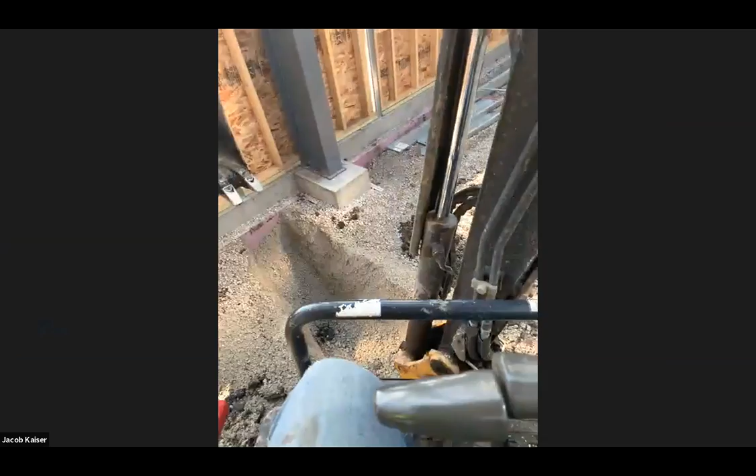Yeah, I'm here now. Hello. Hello, what's up? What's up, brother? Hi, Jacob, look at that. Look what I'm doing today. This stuff here. Oh yeah, that's what I'm talking about. I'm doing a little excavating, making a trench. That's always fun. Are you?

Do you have an operator's button? Doesn't matter. What did you ask, Zach? You have an operator's button. A what? Never mind. I don't know -- operator's button? Button? I don't know. That's what he said. Don't know. Yeah, whatever.

Yep, all right, well good talk. Hey, why don't you throw your phone in that hole real quick? You did it, how's that? Okay, now get on that excavator and pick it up, lift the bucket. No, bury it. Nah, I'm not gonna do that. If it meant an A in the class I would do it, but other than that, wait. I think you should give him the A in the class and just let him bury his phone.

Let's get down to business. What is today, Thursday? Yeah, it's still Thursday. Yep.

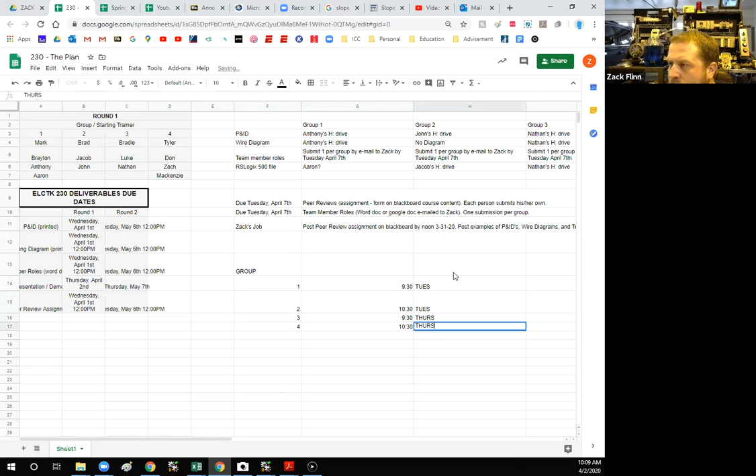Does that make sense to everybody? Starting next week, we'll meet with your group, gather all these inputs and outputs together, and build your own process from scratch together. Sound good? Yeah, that's good.

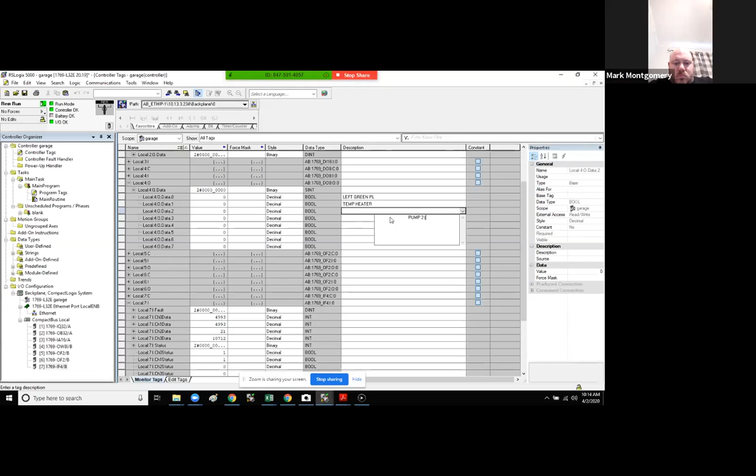Is pump 2. And... 3 is pump 1.

Okay, alright. Module 5 only had one, on channel 0. It had an inverted digital display that displayed 0 to 5.

Oh, okay. You said we were going to have to do funky math with that one. Yeah, it's going to be fun. And then that was it for Module 5.

Module 6, channel 0 had a single-phase motor, and channel 1 had a three-phase motor. So the single phase motor is the temp fan, single phase, white.

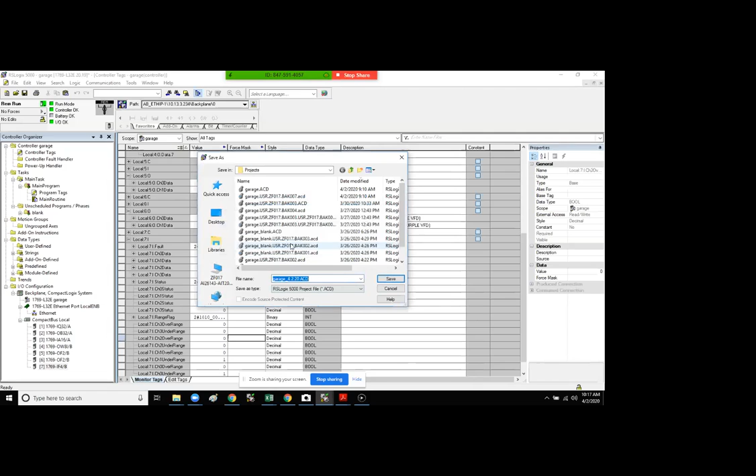Now what do we want to do? Well, looking at what we have, we could make like a fictional heater of some sort, something that heats up and then vents heat while the heating element is going. I don't know what we need a distance sensor for. We use a temp sensor for that.

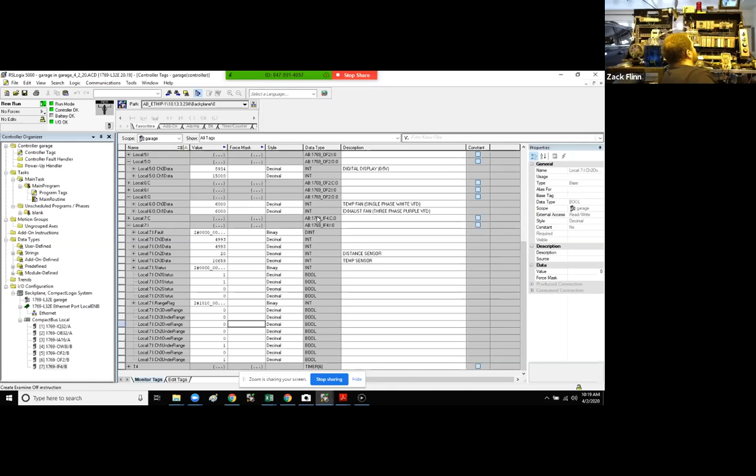So what's turning the water? Which input would that be? Did we not have that one on there? No. Wasn't it a magnet of some sort? Oh yeah, okay, Module 4, output 7. Module 4, channel 7. Yep. And that's going to be water, heat, and stir.

I always like to start off a PLC process by having the stop button going into the start button—if we already have this down, we don't need it. But in this case, it would go to a start button in series with a switch left, going to a bit, and then the bit being enabled by the bit itself for it to go.

Where did I put that assignment? Oh, 232. Does anybody else have it pulled up? Is anybody else paying attention? Or is it just me and Nathan working on this?

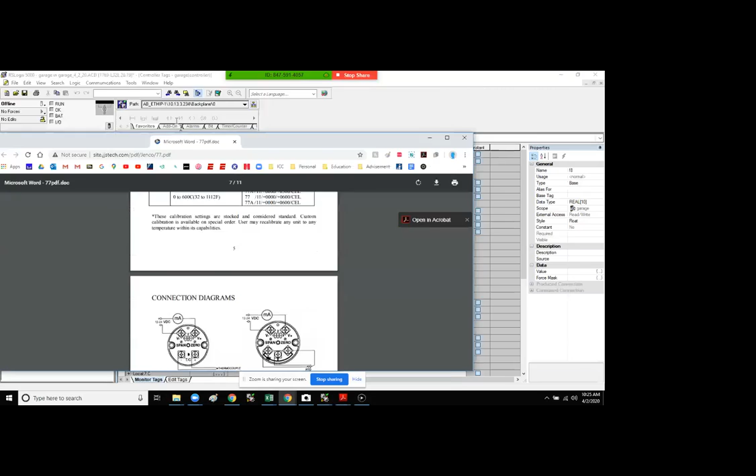Remember, I want you guys to remember that for your final, you're going to have a process like this. Whoops, not like that. Like the one on Blackboard, like this. It's not going to be this big, but you're going to have to set the entire thing up.

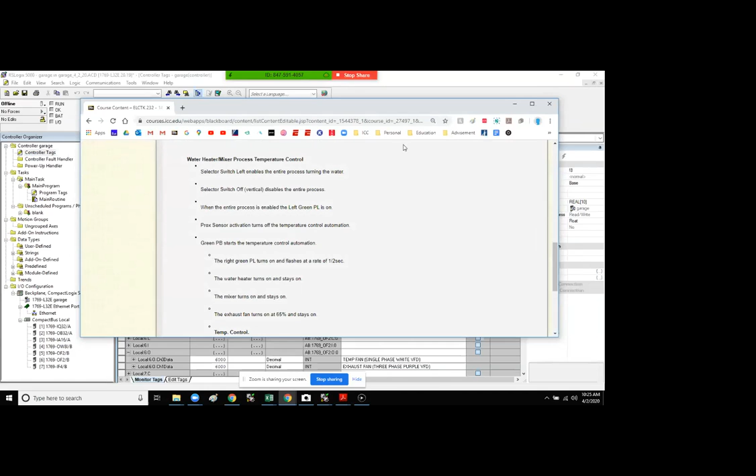So I don't want just one person telling me everything to do. I'm sure some of you are taking notes and everything, that's great, but the more involved you are, the better chance you have of doing well on the final, right? Because I'm gonna help you. This whole COVID-19 process is not fun for anybody, but I'm not going to give you the answers. If you don't know how to set this stuff up, it's not going to be good.

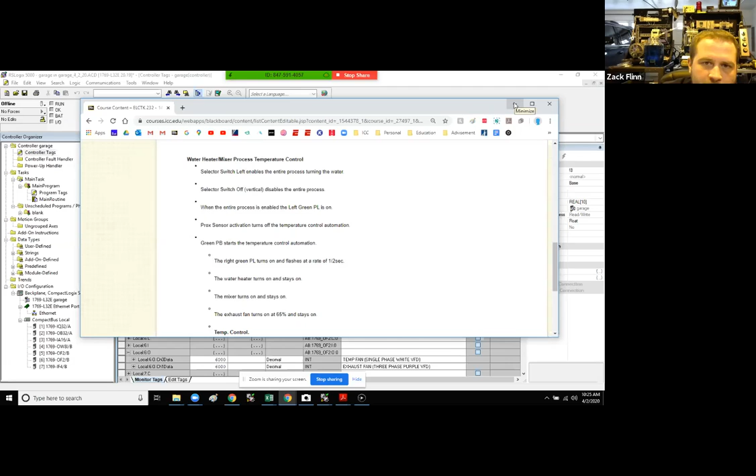Okay, how are we going to set up? Are we just going to write an explanation? No, you're going to get on a one-on-one Zoom meeting with me, and you're going to do exactly what we're doing. You're going to tell me how to set up the controller, how to put the I/O in there, and then you're going to write the logic. You're going to create your own tags, write the logic for whatever process I give you. Would it be simpler for you to just configure it the day before, but we tell you during the process just how we would configure it and insert modules? No. I'm probably going to fail.

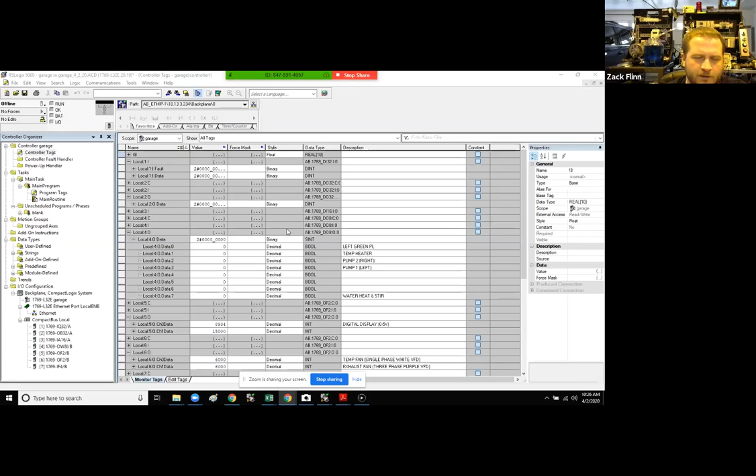Nice try, Nathan. No, I was just wondering. You won't have to tell me.

Okay, right-click on that, go down there. If you tell me, we need to input the I/Os. Tell me how to do the first one, and I'll throw the rest in for you pretty quick. I'm not going to make you take an hour just to tell me step by step how to put these modules in.

Will they be the same modules as we've had, or are they going to be different? They're going to be the same ones, because I'm too lazy to change out all the modules on the trainer. It'll literally be the same setup, Brad, except a different process. Correct, I can do that then. You can do that, maybe.

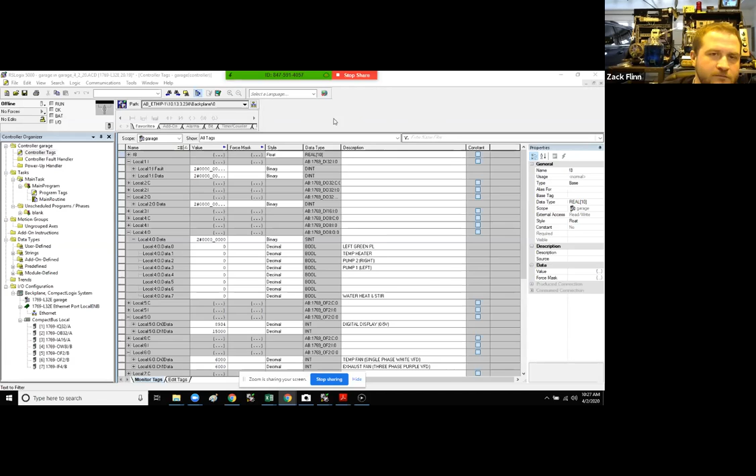I like our RS Logix 500 better than the 5000. Well, I do too, to be honest with you, Don. But if I'm working for somebody that uses 5000, I'm not going to start raising a fuss over it. I'm just going to do it. I completely understand.

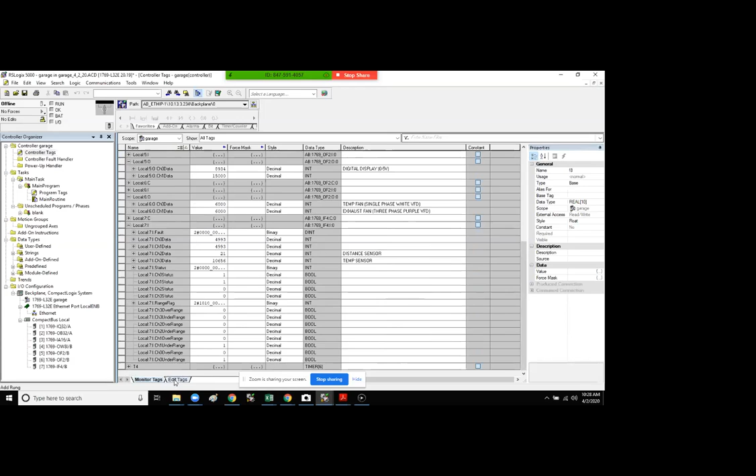Okay, so what are we doing? You were in the process of making up a binary bit. What would you like me to do? Well, there has to be 32 bits, so you have to go to where you were just at, inputting names. Go to that edit tags where you're bouncing all over the place.

And then I don't know what that is. I can't even really see what that is. What is that? It's just a picture of a tag, saying here's where you'd add a new one if you want to. Oh okay, well then why don't we add a new one? Let's do that, that sounds like a good idea.

He was nice enough to give us the timers already. You want to make it Boolean. Very good. How many do we want? You need 32.

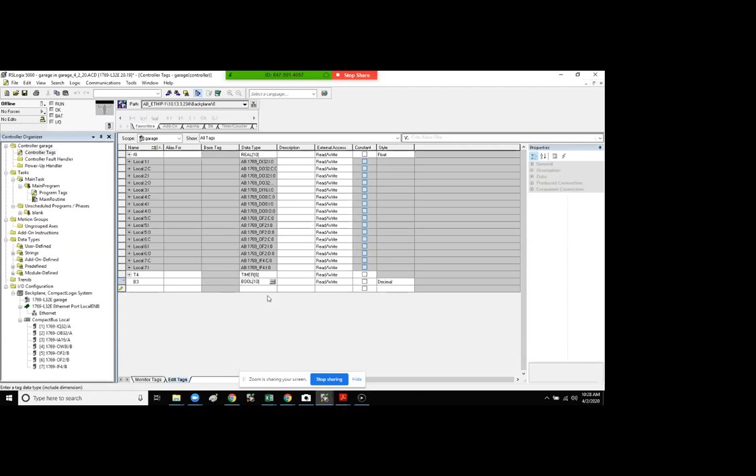Well, 32 is automatically going to come up. Okay, cool, in like Flynn. Okay, so put the bit in.

Oh my God, how much longer we got? Half an hour, potentially. What did you say? Half an hour. Yeah, it feels like forever. You're right.

Sorry, we'll get through this together. Sorry I was quiet during that first 20 minutes, I may have been distracted. Oh you're fine, it's okay John, I've been carrying the class. I appreciate it, Nathan, nice to see you step up, thanks to Nathan, while Jacob's at site and I'm working on other work.

Want me to label this thing? Yeah, label it, what do you want? Totes McGoats run bit.

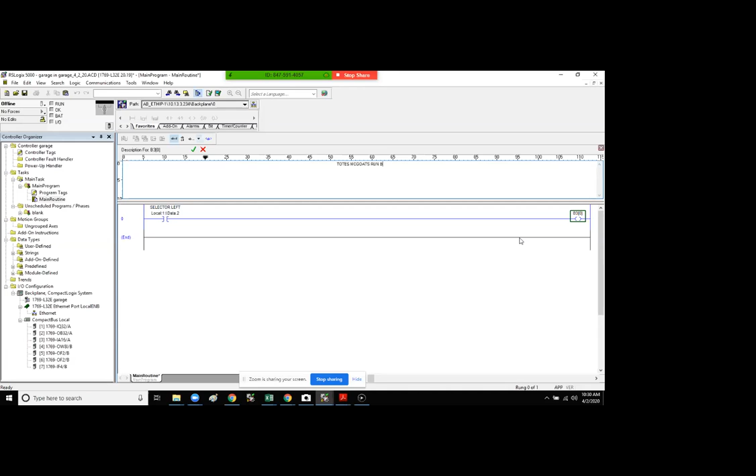That works, that's a little long, especially since we're trying to make it shorter when we have to. You know, it'll work, it'll work.

Yeah, you're never going to forget it, are you? I'm not. Would you put the bracket over the thingy? Selector switch? Oh, you don't need it because, okay yeah, never mind.

All right, selector switch left enables the entire process, turning on the water. Turning the water.

Wouldn't you just put the output of channel 7, water heat and stir bit right there? Where do you want it? At the end of the second line? At the end of line 1, I guess.

Yeah, but can we put it on rung 0 somewhere, just to save room? I mean, you could. Sure, where do you want to do that?

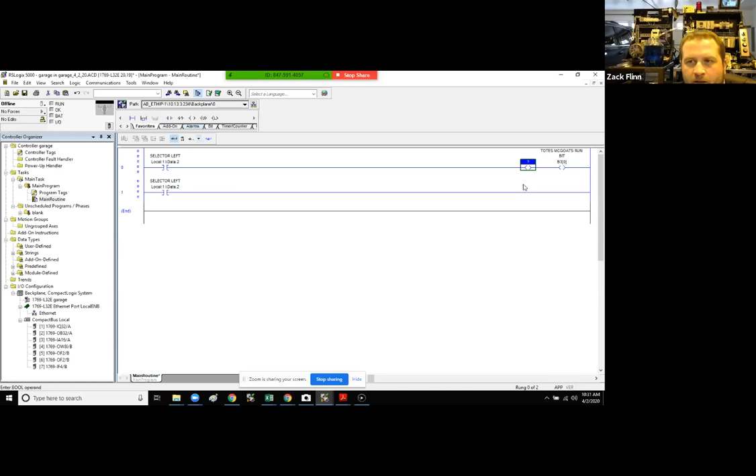Doesn't it have to be? Does it have to be in parallel with the other bit, or can it be in series? You tell me. If we put it here, and this one becomes false, you've got to put them in parallel. Yeah, you have to be able to. This one will become false, right?

Okay, it's like any output, right? Yeah, you can't have two outputs on the same rung. I mean, Zack probably can, but if we do, it won't work.

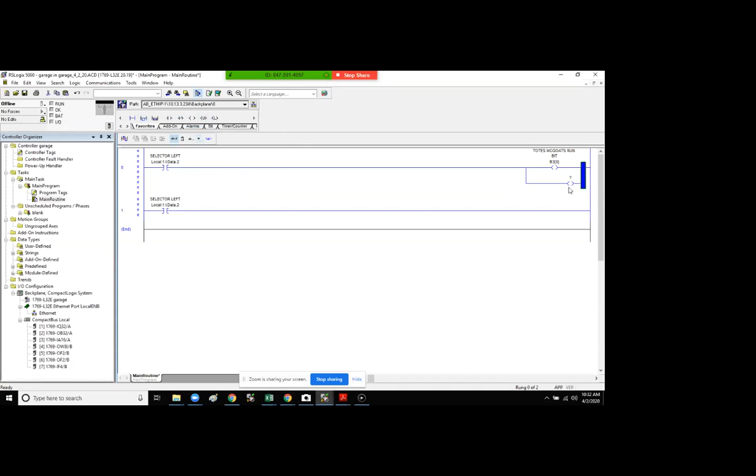Now how come we have the selector switch in both rungs? This is just a, oops, that's a run bit. Yeah, shouldn't that be the binary bit that we just made? That's an A right there. I caught the mistake, sorry.

What are we trying to do there? When we have the selector switch to the left, what are you trying to do? Wouldn't that be turning on this entire process, the water heater slash stir?

You need to turn that on. So whenever the process is on, the overall process, it's like there's an overall process, and then there's part of the process where we're controlling the temperature, right? All right.

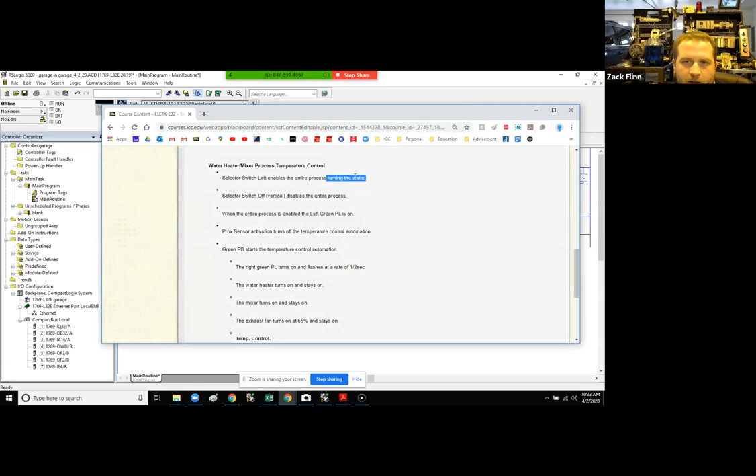Okay, so heat and stir are going to come on at the same time. That's how I'm reading it. So we need that output to be module 4, channel 7 for the heater and stir.

But how do we get the heater not to turn on and just to stir? So that's the water heat. Oh, okay, we're going to kind of fake the temperature heat.

Gerard, your mom wants you.

Hey, could you do something for me, Zach? Could you put a normally closed contact in series with the normally open contact and make it the selector, right?

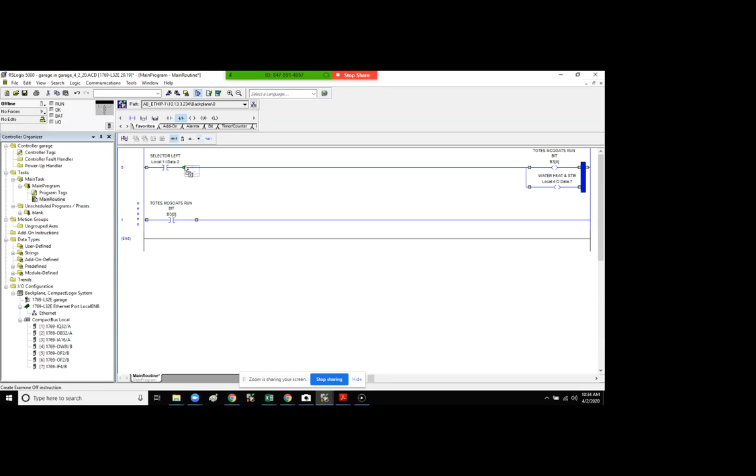Why are we doing this? So that you can't run both at the same time, correct.

Which is fine, but I don't think we need it, because I guess unless... whatever, we'll leave it. Doesn't matter. It wouldn't be necessary, I don't think, unless something's shorted together. It's totally redundant, but it's a safety thing. I like it. Okay.

That's funny because every time I walk into your classroom... Don't go there, John, don't go there. I just went there. Does it make you sick to your stomach? Makes me cringe, cringe, that's what it is.

All right, should we test this out? It's a good idea to build a little bit of logic and test it out before we move on.

Yeah, sure. So suppose when I energize selector left, this bit should become true, and the water should start to heat up and stir.

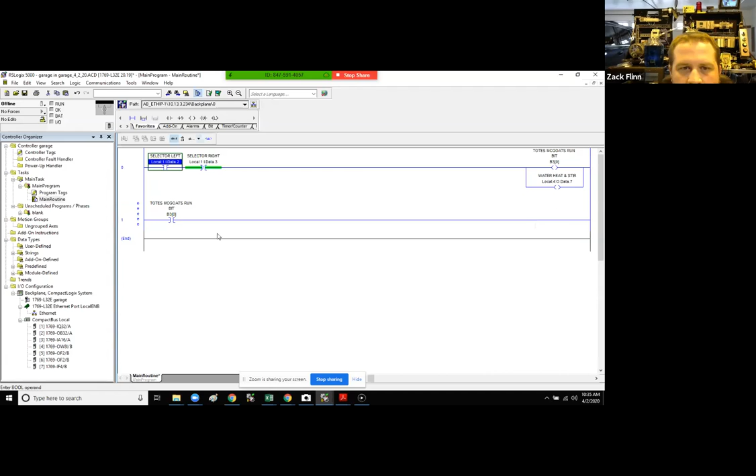Oh great, could you put the motor in that rung? Otherwise we're gonna get... oh never mind, you did it. Okay cool. What motor? It didn't really matter which motor, it would have just been a short. Right, yeah, get a fault.

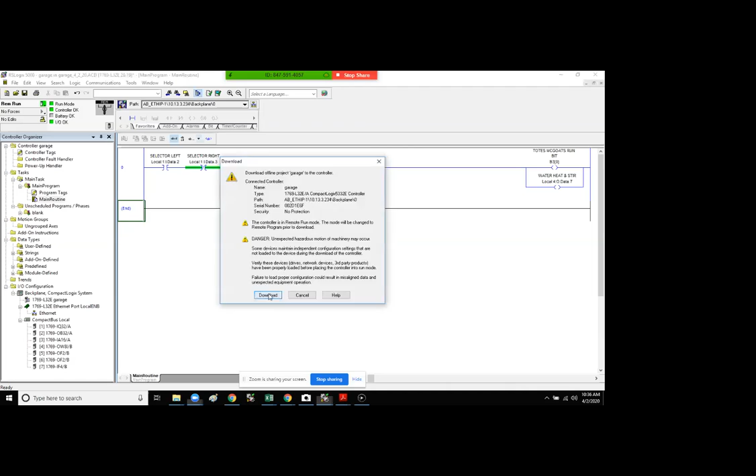All right, selector going to left. Cool, I'm going to show you what's going on here.

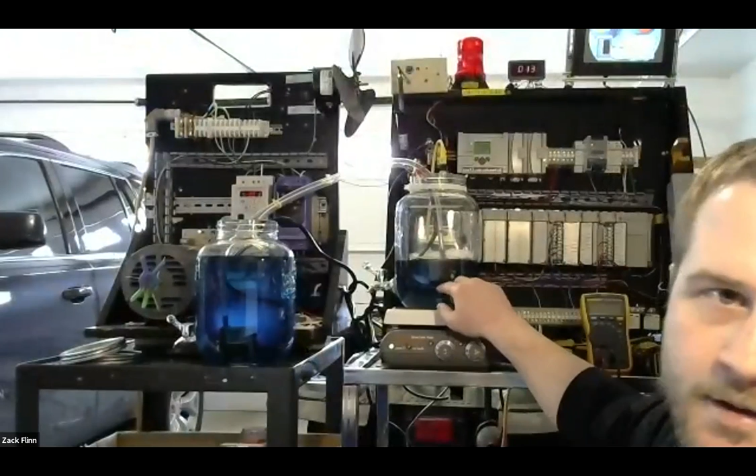So, for some reason, I smoked whatever the motor is spinning the magnet inside there, so it always stirs. I can turn it up and down, but the heat won't come on until we energize that bit. So you'll see the two pilot lights come on for those outputs. Ready?

Oh yeah, all I'm seeing is Kenzie's face because she talked. You got to pin the video. You can also go to the top right and go into gallery view. You can, but if you want to see full screen, click on the three dots. Hit video, there we go, and then it won't move.

Are we making moonshine, Zach? Well, Brady said yesterday that it was a meth lab. So whatever you guys want. Oh okay, why not meth, it's worth more. You like the blue food coloring so you can see it better? Yeah, that's nice, it'd be better if you had LED lights on it. Yeah, I'm still not really thrilled with those. I've got some UV lights. You know, you seem to smoke a lot of components, Zach. I've got some.

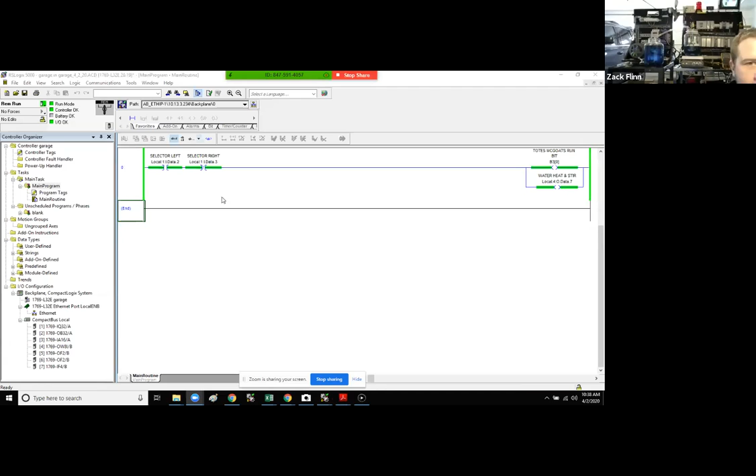John, just go to bed. I'm just giving you shit. Whatever.

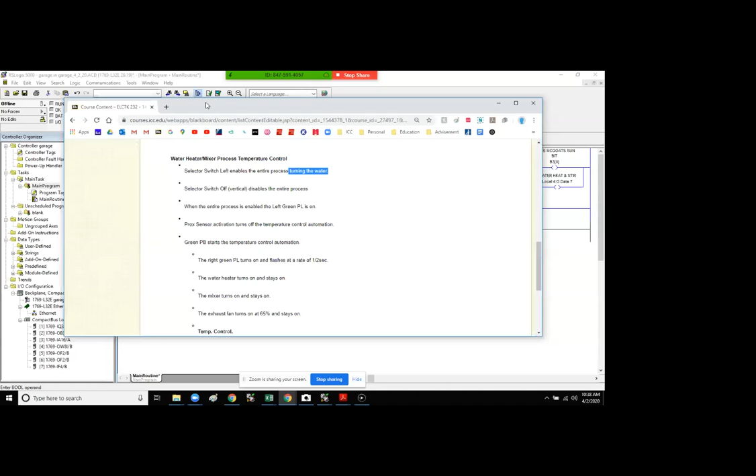Now what do you want to do? Where's those instructions at? Are those on Blackboard? Where are they? It says 232. They're on Blackboard, I don't see it. What class are we in? 232. Well, right now, technically, we're in 230, but we're working on 232 stuff.

I'm just sitting here watching. What I'm thinking is you're going to need to know this stuff for both classes, right? We're using the same setup, so the more we practice this stuff, the better off we'll be.

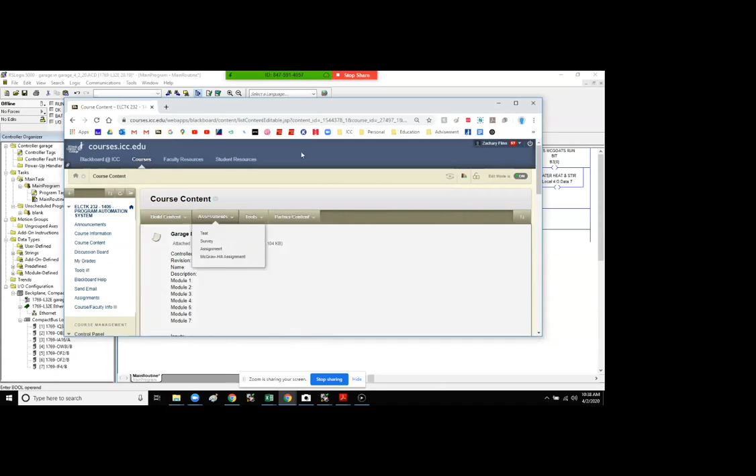All right, so we need a third output in that branch over there where the bit and the thing are. It needs to be the left green pilot light.

I had to rewatch episode 4 of The Witcher because I was doing taxes, so I missed a lot of it.

Yeah, that's what I'm gonna have to go back a little bit on season 2 of Following because...

Is that your dad? Shut up, Nate. Tell your dad I said hi. Did someone say dad? Dad said hi. He said hi? Hi, bye, Nate. Hi.

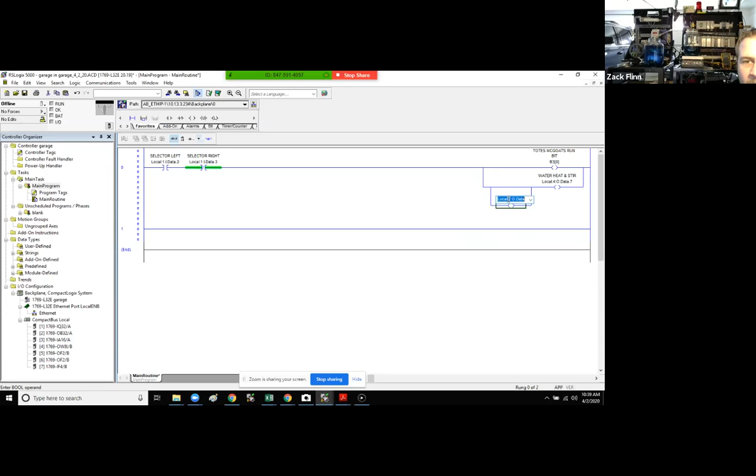You got the green PL on already? So I was gonna ask, do we have any of the green lights on? We want the left, or any one? Green, red, or yellow? The left says green, the right green PL light turns on. Oh no, I'm sorry, left green. I'm reading ahead, sorry. So the left green is the 120 volt one, right?

Yeah, so it's output 4? I can look here. Let's see, left green pilot light is 40. Output 40.

Cool, all right, so now we'll need another line. I'm not even looking at your screen, so I don't know. But we'll have to start one for the green push button. Starts the temperature control automation. Okay.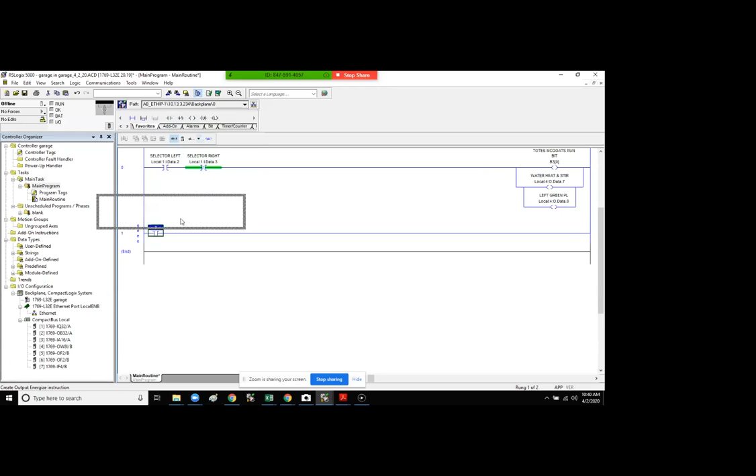I didn't know you could drag that down off of there. Were you just able to drag that down onto the main screen? I think that's only for 5,000.

Zach, put another normally closed now on this line, because this line won't have the turn off everything, so it won't be redundant. We need the selector switch, right? I'm not sure what you're trying to do. Right, so if you put the green push button there for this next system, and then you put the selector switch right there, it'll turn off the...

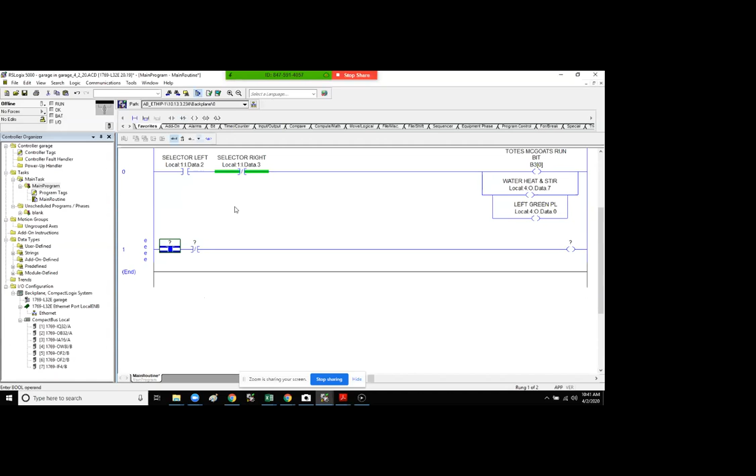Well, don't forget what we're doing with this rung. We have this guy here, right? We want to use that to run every single rung now, right? Except for, you don't need them for timers and everything else.

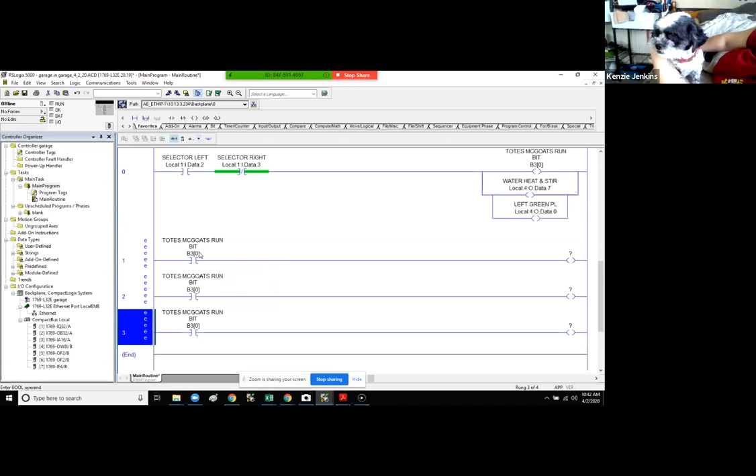Don't you want the green push button? I guess that works. Okay, yeah, you're right, put the green push button in also. What this does, anytime we create a rung now, I would create one that looks like this. So if I copy this rung, every time I add one, I have the Totes McGoats run bit in there. So if this thing ain't true, nothing's happening, right? None of these rungs will be true unless the Totes McGoats bit is true. You're right, you're right, I'm wrong. I thought I was wrong once, but I was mistaken.

Oh my god, that's so stupid. Pretty cocky. Why was the ketchup blushing? Oh God. Because it saw the salad dressing. Gross.

Brady's groan. Put your mask back on, Brady.

Okay, what do we want to do on rung 1? Which one, the Corona one or the ski mask one? Which one? Oh, wrong one. You want to add the green push button to?

Oklahoma, only two things come from Oklahoma. That's going to start the temperature thing. Steers and queers, boy, I don't see no horns. That's from Officer and a Gentleman.

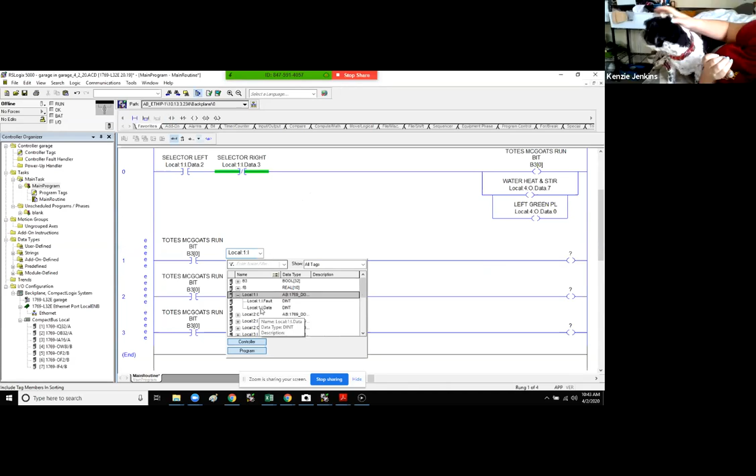What am I missing here on Zoom? What's going on?

They don't know. Junior, where you from, boy? Oklahoma, only two things come from Oklahoma: steers and queers. Boy, I don't see no horns. Nate, did you hear that? I'm pretty sure Kenzie's dad just called me a queer. No, you're right. Have you ever seen Officer and a Gentleman?

No, I thought that was Full Metal Jacket. Oh no, it's Officer and a Gentleman. It's also Full Metal Jacket. Louis Gossett Jr., when he's yelling at him? Yeah, Private Pyle, yeah. No, it's a classic movie, because he's yelling at Gere, at Richard Gere. Well, not at Richard Gere, but Richard Gere's in that scene.

Trust me, I believe you. It's just been a while since I've seen that one. Thank you for your input, Dad. I thought you said it was back up. Oh my, and all of a sudden it just clicked. That's funny.

Can't see. Zach, can you pull up the list? I'm sorry, I'm still waking up. The list so I can finish writing it down. Oh yeah.

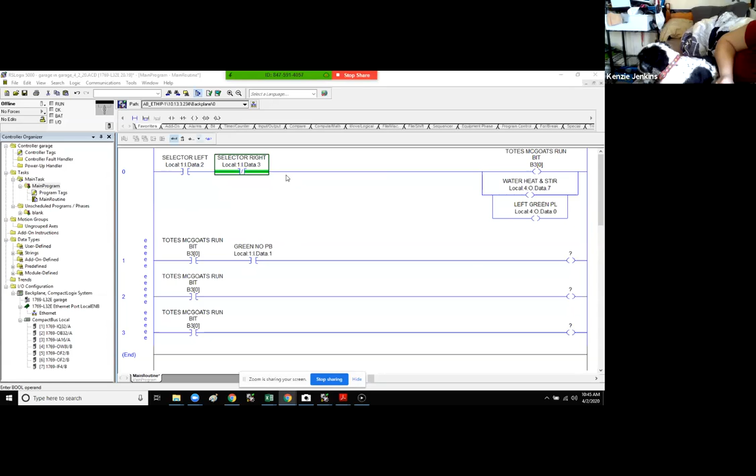Okay, so we got the green normal open push button, and now what do we want to do? Now you want to put the water heater.

We already got the output, water heater in there. Okay, then you want... We already have the mixer, right?

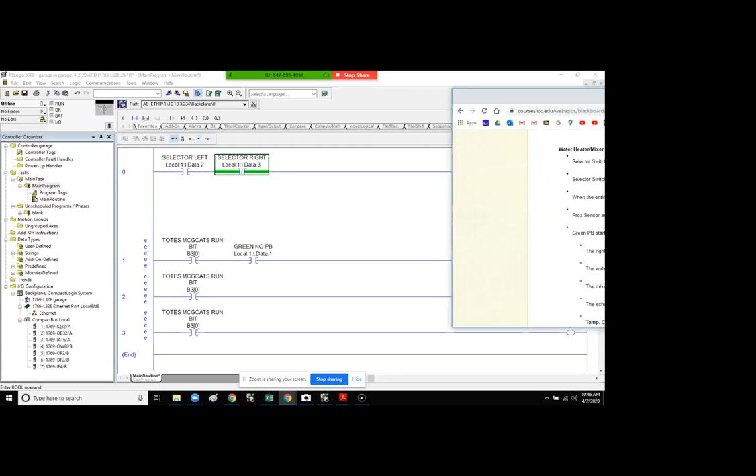Yep. Then we need the pilot light. Put the... not the pilot light, the strobe light. No, the right green.

How do we make it flash? Oh, you want us to do that. We need to put... dang it, Zach. The right green.

We need to put a timer on that. We need to put a timer, or Zach, what's that one that wouldn't work in 5,000? Dang it.

All right, someone Google how to make something turn on PLC at a half second. Oh. Nope, we're not doing any Googling.

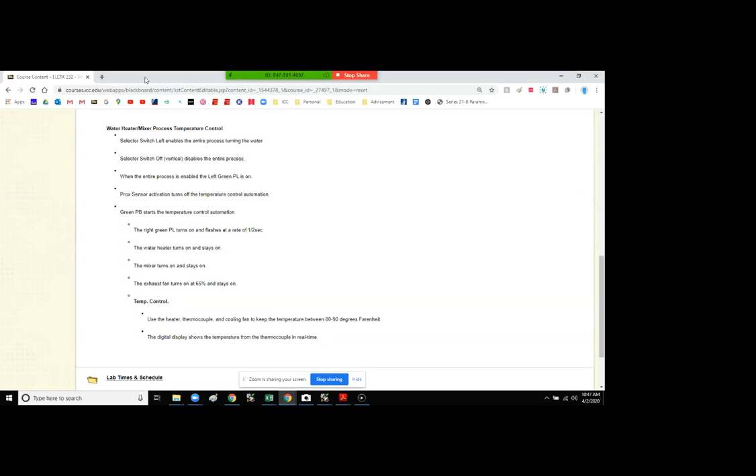The right green pilot light turned on and flashes at a rate of half a second. Isn't that just a time on delay? Yep. Yeah, because we used that in our trainer.

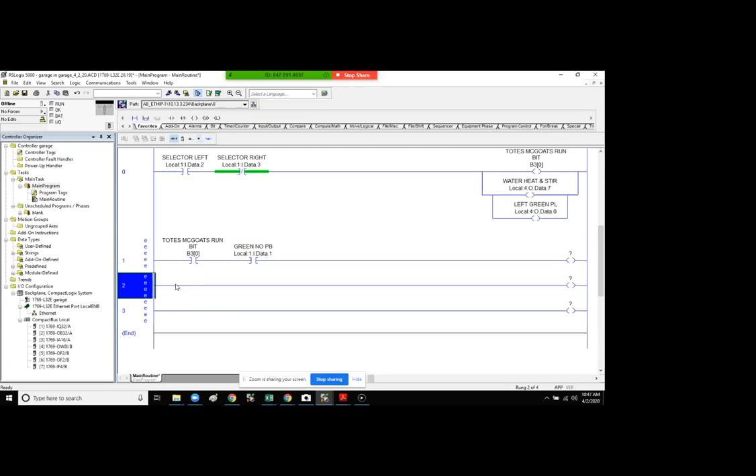It's not just a timer on delay, Kenzie. It's also a reset. Okay, listen here, bud. We'll get to that one step at a time.

Now what? Okay, so the timer, just set it to the first available bit. And then the preset, what did we say, half a second?

Yep. I want to show you something on RS Logix 5000. I had to look this up in the manual the other day because I forgot. Every preset default value is in milliseconds.

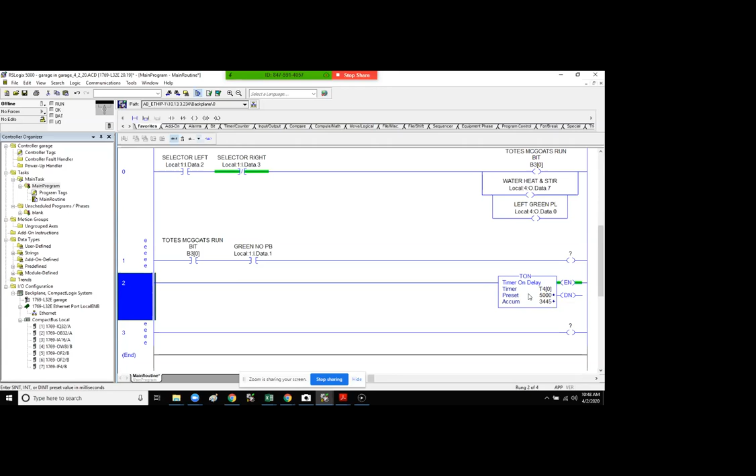Okay, now what? Okay, so then we have to set a bit to close whenever the time on delay is done. So it has to go based off the done bit. Where do you want it to go? On the next rung down. That's what I'm talking about.

Okay, so now we have the timer set up. What's turn? Let me pull up the process because I don't want you to have to keep going back to check. Right now, we're just trying to make a half-second flashing deal.

So an off delay timer? Do you want me to, what'd you say, Brady? Off delay timer? No, it would be another on delay timer, I believe. Alright, and then you'd have that other on delay timer.

Bless you. You'd have that other on delay done bit control the first timer, the second one. So I need this done bit to control this one.

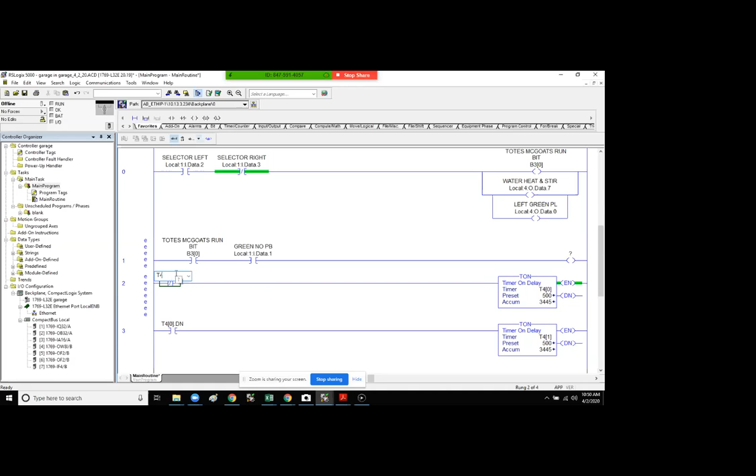Cool, so we just made a half-second flasher in these two rungs. Next, you need to get your exhaust fan to 65%.

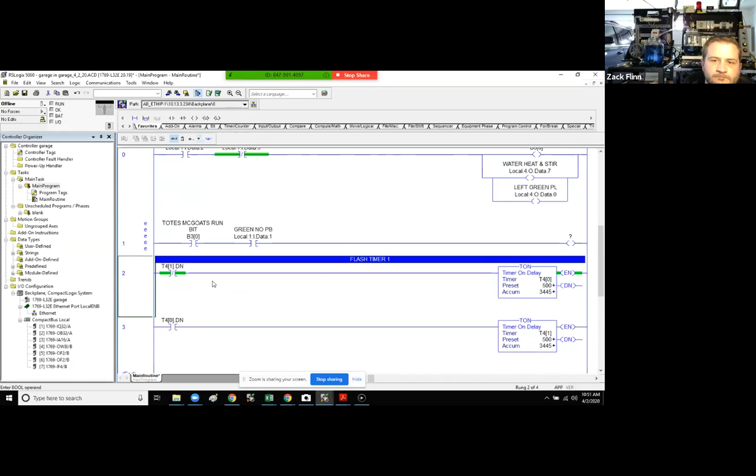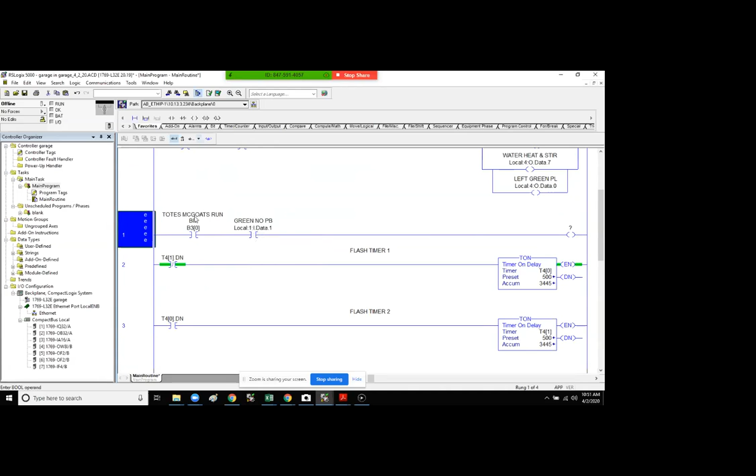Okay, we haven't done this yet. This rung's not complete, right? Right, we got the run bit, and then we push this button. What's supposed to happen? The water heater turns on and stays on. So is that... the mixer turns on and stays on, and the exhaust fan turns on and stays on.

So in that case, we're going to need the heater output as well as the fan output in parallel. I'm going to need a seal-in contact to keep them going. Well, the way we've written our logic so far, we've already got the heater and the mixer turning on, correct?

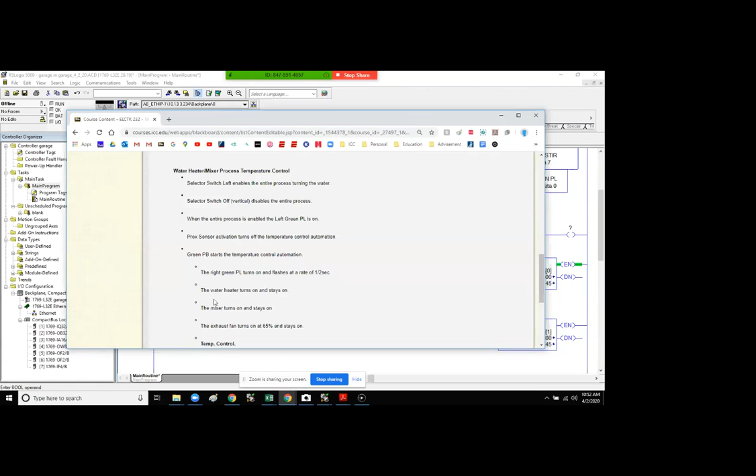Yeah, this needs to be edited, doesn't it? Yeah, the fan does. So do we just add that to the first rung? No, just move those outputs from the first rung down to that green push button rung. All that first rung is supposed to do is turn everything on, so enable B3.

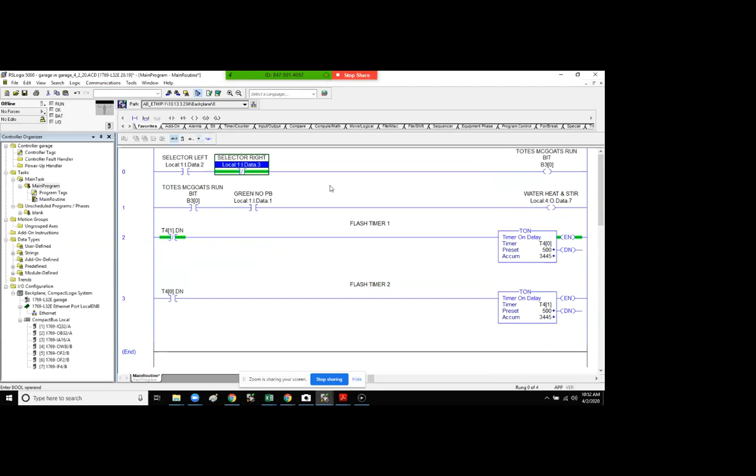Also, this doesn't have to be the next step, but don't we have to add B3 turning on for the timer, the flash timer 1? Because if we don't, then it's just automatically going to start before we even start another process. No, the timer needs to be activated when the green push button's hit. Okay, well that's right. So we just need to make sure to add another thing to that rung as well to start off. Yes.

What do you want to do? Did you move all those outputs down? Add a normally open bit to the rung with the flash timer 1, so that it will close once you push the green button.

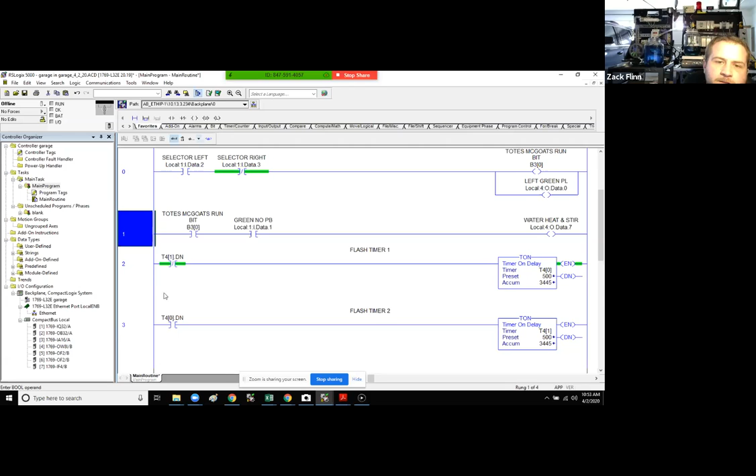What if we take this rung and make it a second run bit? So this run bit energizes everything. Yeah. And we'll put these outputs in later. So this button's going to energize another B3. Okay.

So what do we want to call this one?

See, if you do it that way, aren't you going to have B3 and B4 on every rung? Because once that B3 is no longer true, it's supposed to shut everything off. Well, I guess it still would. Never mind, I'm not thinking.

Can you explain that? That's what I'm thinking. No, as soon as that B3 zero shuts off, it's going to kill the green push button line anyway. Right, so it'll kill everything else.

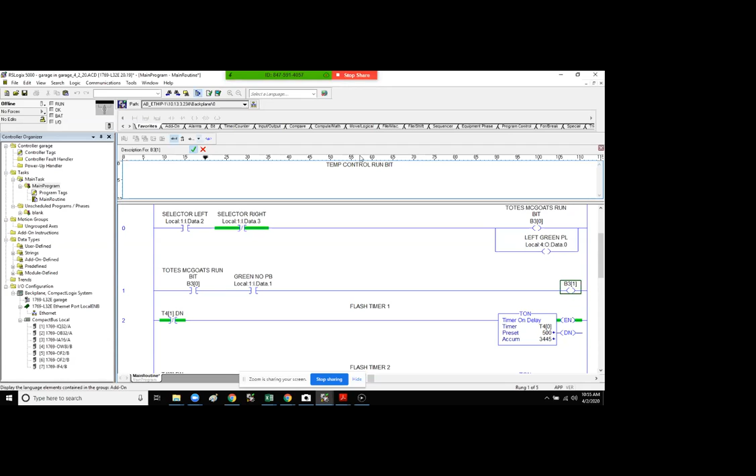We do have to add a latch though on that push button if we're going to make that an output line.

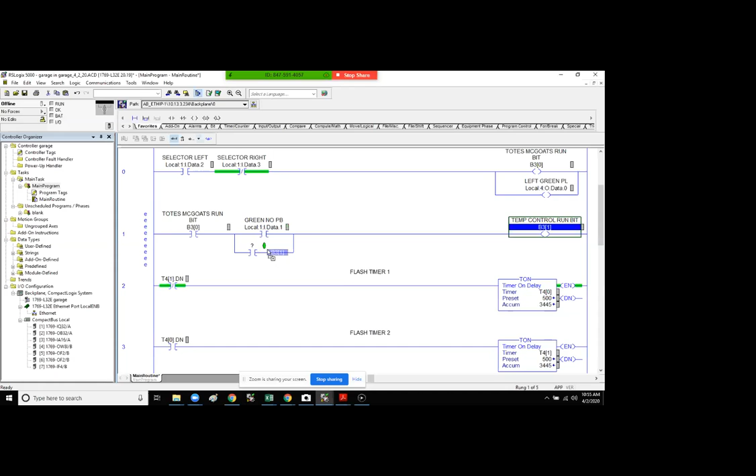Tell you what, this is a little bit more difficult with everybody chiming in on it. Yes it is. I'm going to put this stuff in there and then I'm going to show you what I'm looking for.

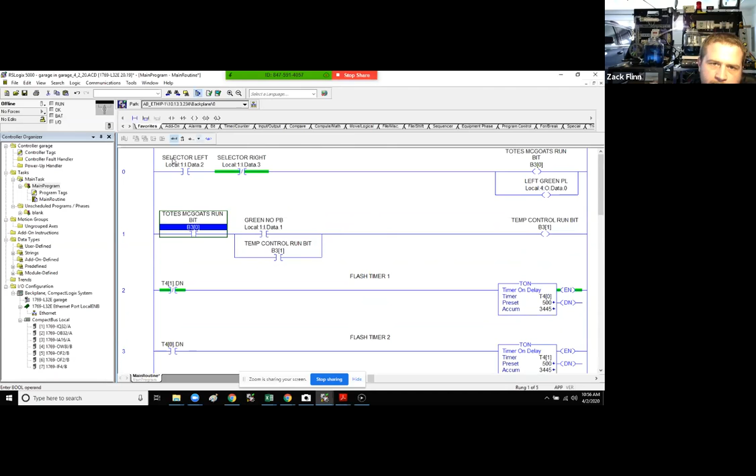Okay, this temp control run bit is going to be on after this bit becomes true. So what I want here is you turn the entire process on and the green light's telling you, okay, it's ready. You can't start the temperature control process unless it's like a second kill switch, right? Right. So then you hit the second kill switch, green start button.

Another thing, what is going to stop the temperature control process? Is there anything in there yet?

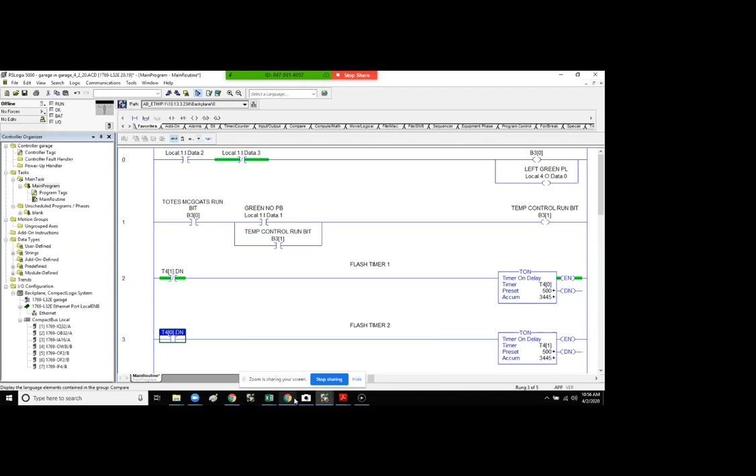Wouldn't it be turning off the initial run bit currently? The prox sensor is supposed to turn off the temperature control automation as well. Right, so that's going to be like another stop button.

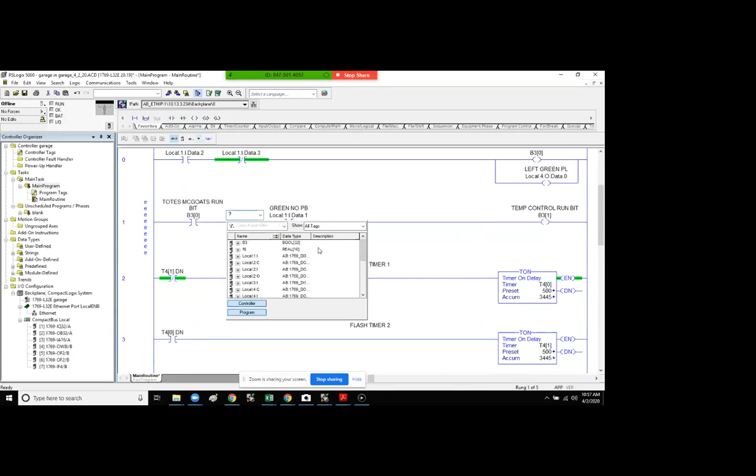I'm going to put this stuff in here and then I'm going to show you what I'm talking about. What, are we doing this wrong? No, I'm just guiding you a little bit more now because I know it's a little confusing.

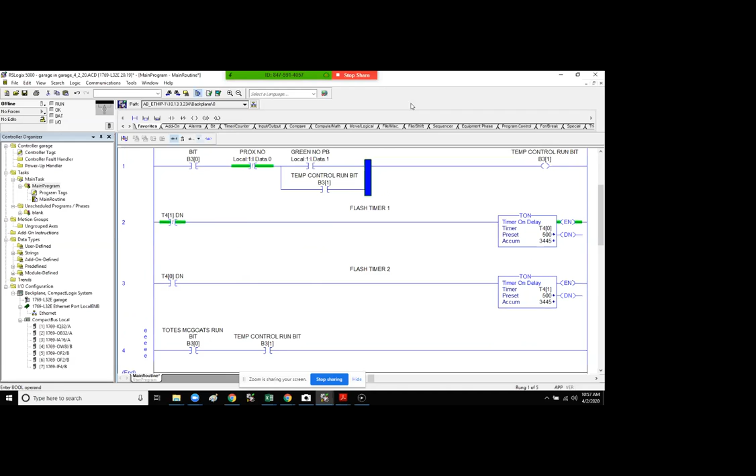All right, so we've got the run bit on. I push this button, the run bit turns on. What do we want to happen when we push the green button? All right, we want the light to flash, we want the water heater to turn on, and we want the exhaust fan to turn on.

Let's just start with the light flashing and then we'll call it a day. Alright, get this whole process up to 10:58. Calling it early. Two minutes. Now we can keep going if you want.

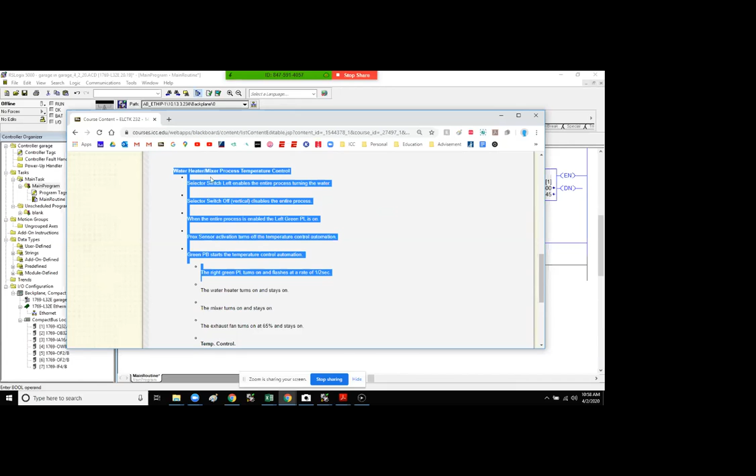Yeah, I'm good either way. Let's put the pilot light in there and make it flash at a half second. How are we going to do that? We would need the timer timing bit of one of the timers.

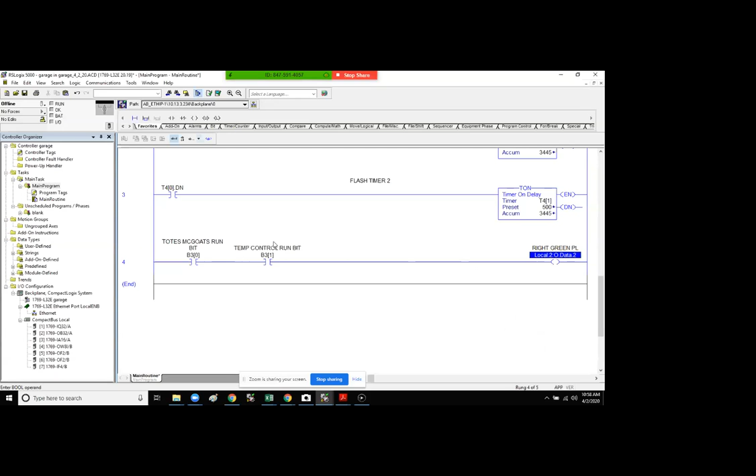On the right green pilot light, which is module 2, channel 2. Cool. And then you said flashing with a timer timing bit? Yes, correct.

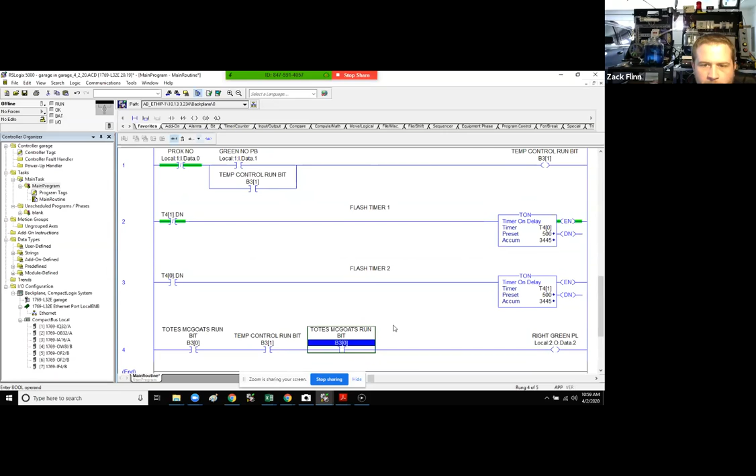Whoops, I don't want to do that. I was going to say, you already have one of those. Doesn't matter which one, right? No, it doesn't.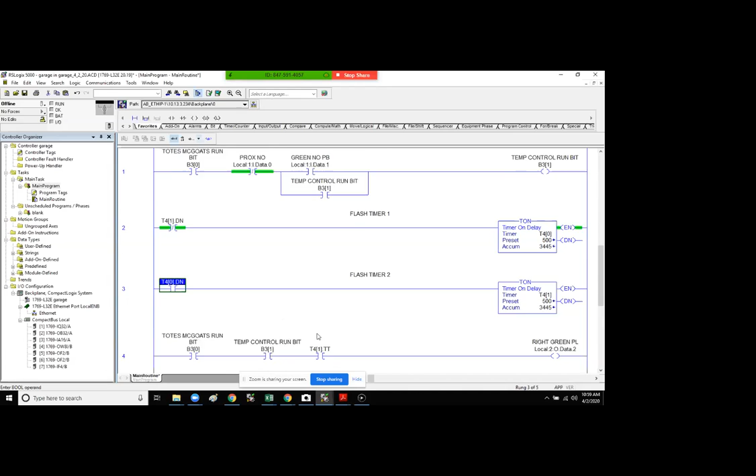Can't use that. Can't just do it. Oh, yeah.

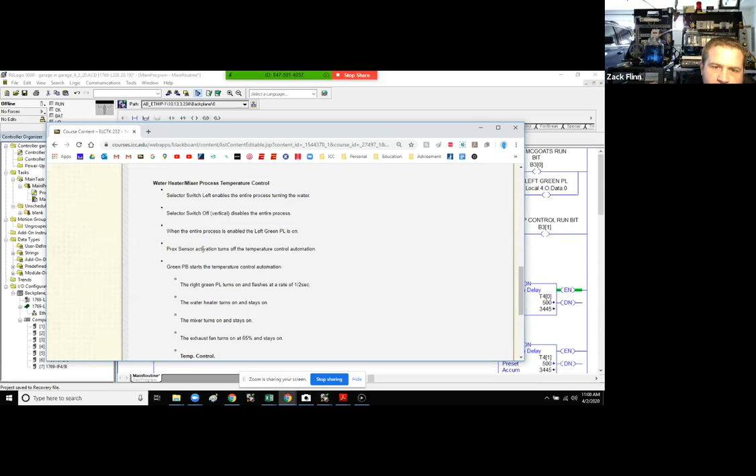All right, so if we wrote this right, turn the left switch on, or turn the selector switch to the left, green pilot will turn on. Hit the green button, the temperature control automation turns on, and right now all we have is the right green pilot light turns on and flashes at a rate of half a second. And then if I hit the prox sensor, that will turn off the temperature control.

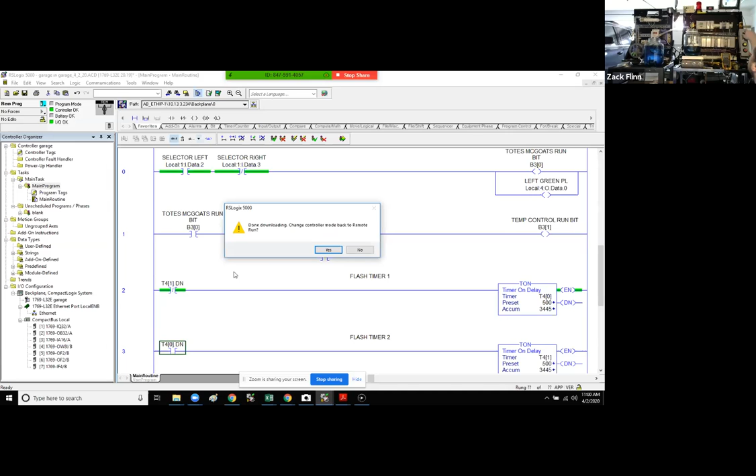Should we try it? Yeah. Timer's working.

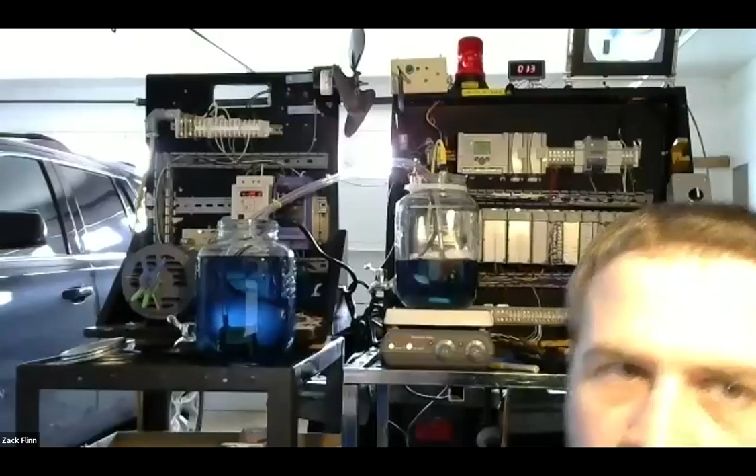All right, so if I turn the switch left, what should happen? Everything should turn on. Just the right green, just the left green pilot light, right? Right. Cool, so that's telling me, alright, now we're ready to go.

And if I hit the green button, now the other light is flashing at a half second. So that's cool, that's all we got. And then our stop is this prox sensor.

Cool? Yeah. The only other thing is, if this is off, nothing will happen, right? Correct. Yeah, if I turn that on and get this started, that's the temperature control process now started. If I turn this off, that will kill everything, right? That was the point of having the two different run bits. Make sense? Yeah. You want to keep going?

Yeah, let's at least get... there's not much more logic to make the fans turn on and the mixer turn on. Okay.

Everybody's cool with that. The only thing I want to concentrate on in this process is using that compute function, because we didn't get into that too much before we went to break. And that's going to take a little bit of time.

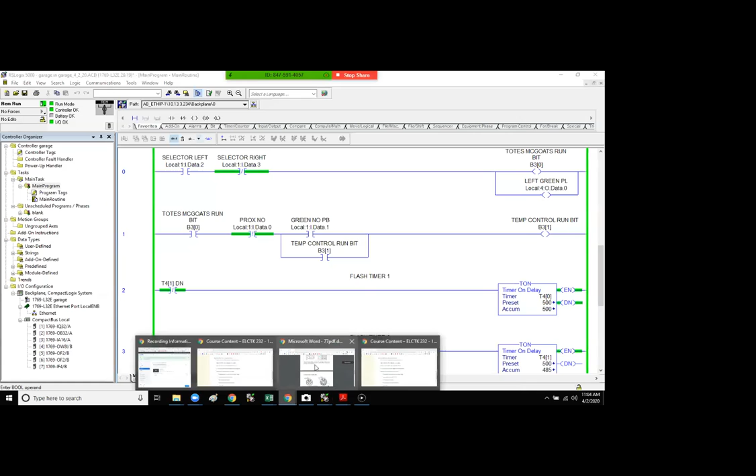What else do we want to do today? I got a question. What's up? Are the liquor stores still closed? I don't know, I don't drink. Couldn't tell you either, bud.

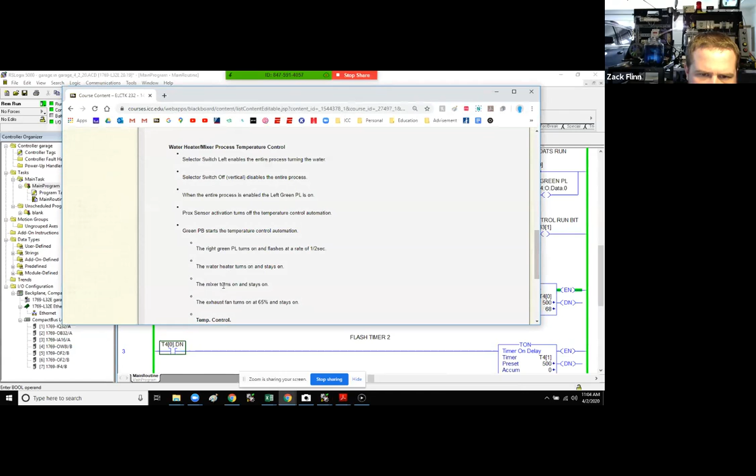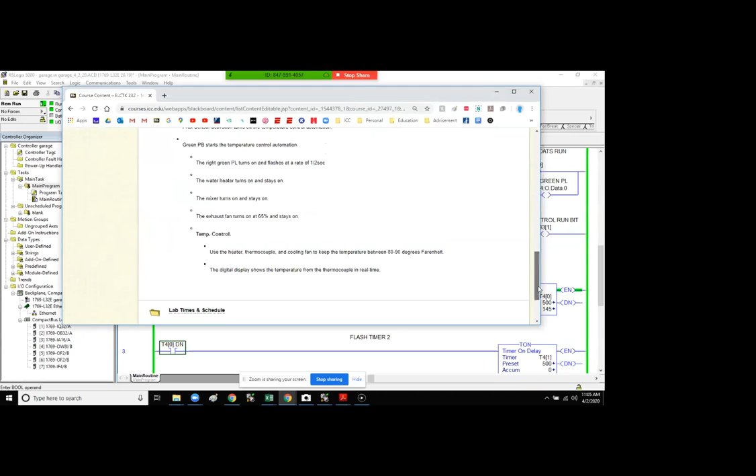The water heater turns on and stays on. The mixer turns on and stays on. Those are both pretty easy. The exhaust fan turns on at 65%. You'd have to do some Boolean algebra to get that. No, you'd have to interpolate to get that. Yep, so we need to do that compute function.

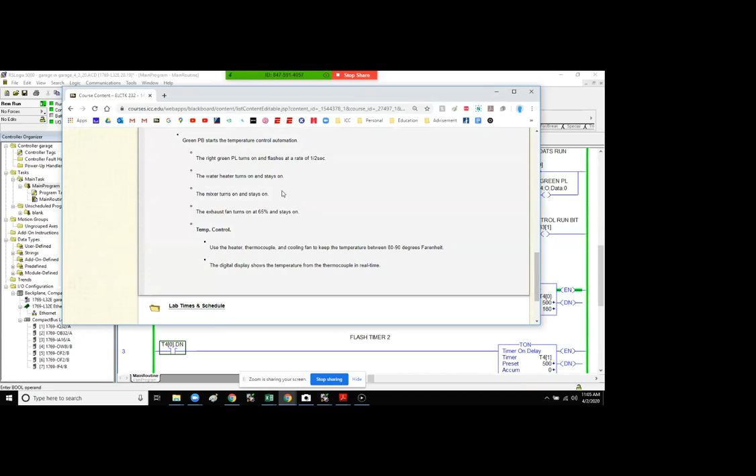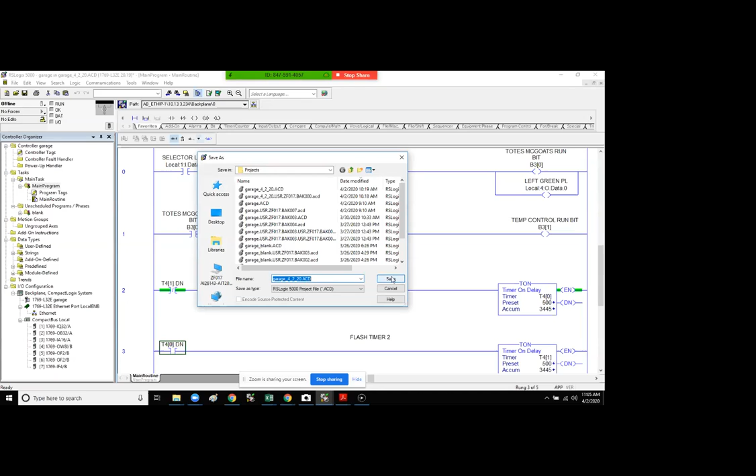Okay, anybody have any questions about anything in any of the classes? I need to go back and watch the first video because the first day of class I basically missed it. Okay, good, well I'm glad I'm not putting them up there for no reason. Yeah, I think it's helpful. We were, since you were talking today about it, how it's really important that we know which output is which and everything. Obviously it's going to be helpful to have those to reference.

Definitely, I tell you what I'm going to do. I'm going to make a spreadsheet and put it on here with all... remember the first part of today, we just went through and I labeled all the tags. I'll make up a spreadsheet for you guys to have, and you can use that for the rest of the semester, because I don't think I'll change anything else on here. I mean, I got so much stuff on here, it's ridiculous, so there's no need to change it.

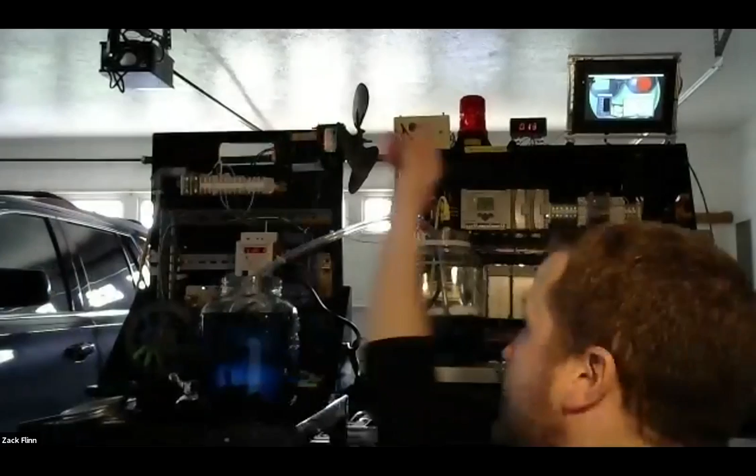Another thing I want to get through once we get this assignment done, I want to teach you how to use these, program these HMIs. I really wish we could have sent you guys home with some so you could play around with them, because they're kind of fun. All you do is create your tags in RSLogix 5000, then export them into the software for that, put those same tags as inputs and outputs, and it'll display. You can make displays, you can make your own buttons. That's pretty cool, is that the panel view?

That's really cool. What'd you say, Mark? Is that the panel view? This is not the panel view. This one, I don't know what it's called, EA9 or something. It's made by Automation Direct. It's a lot easier to use than the panel view.